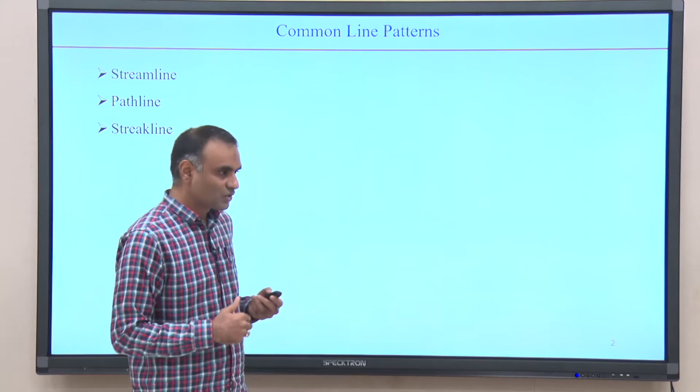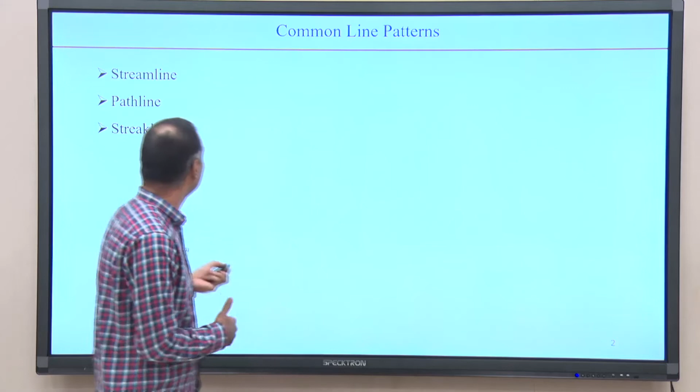If you want to compare your flow visualization experimental studies with some theory, you can compare them following this mathematical framework. So let us look at streamlines first.

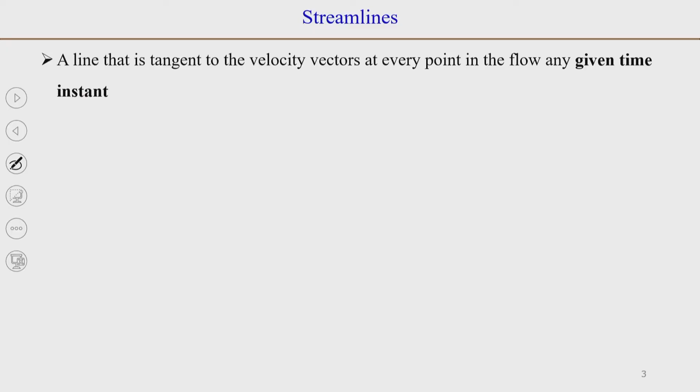Streamlines you might have read about in school probably. A streamline is a line that is tangent to the velocity vectors at every point in the flow at any given time instant. So if you plot a streamline, then at every point on the streamline, the tangent represents the velocity at that particular point.

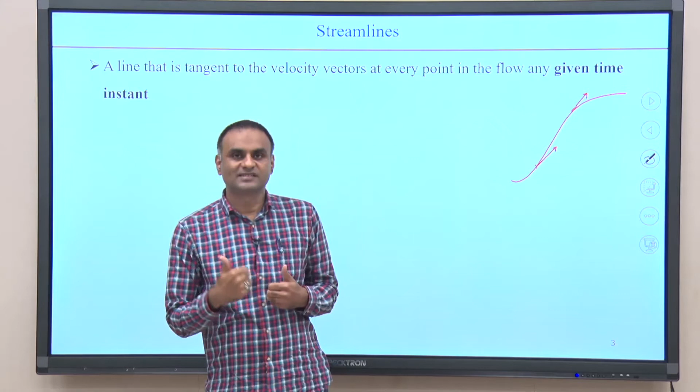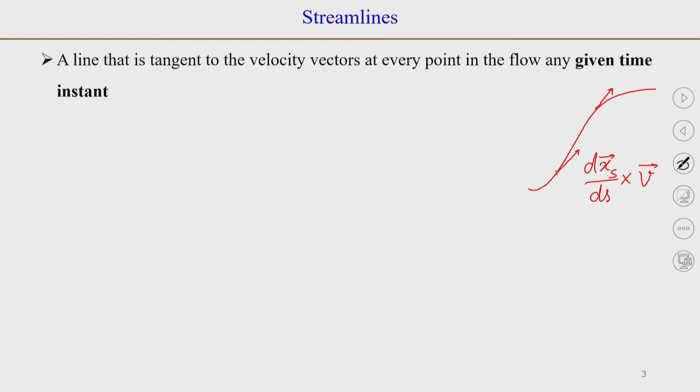That means if you take the position vector of the streamline, let's say dxs vector, and take its cross product with the velocity vector, so if you have dxs by ds, which is the slope of this, multiplied by the velocity vector, that will give you zero because they are along the same line, or parallel to each other.

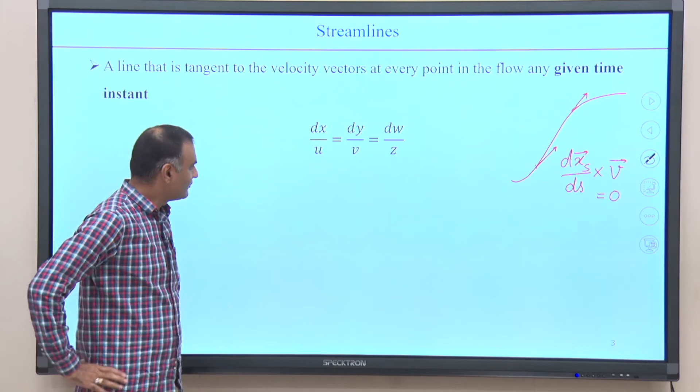If you simplify this, what you get is dx by u is equal to dy by v is equal to dz by w. Here x, y, z are the coordinates at that point in the streamline, and u, v, w are the velocity components along the x, y and z directions.

If you have a two-dimensional flow, where this should have been the other way around - this should have been dz and this should have been w. Sorry for the typo.

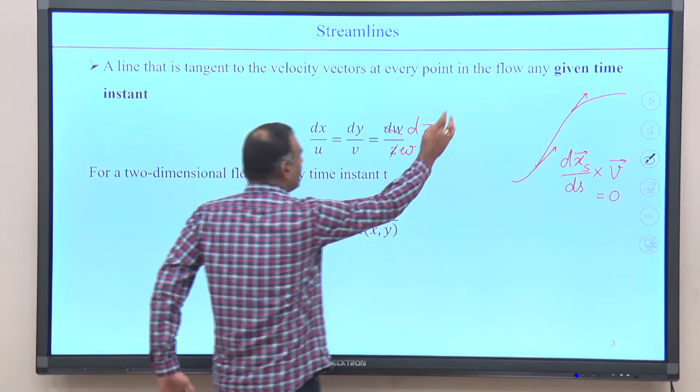If the flow is two-dimensional, then this component will not be there, the z component of velocity will not be there, w is equal to 0, and then you will have dx by u is equal to dy by v. So you can easily find the slope of this streamline by rearranging this equation, that dy by dx, which is the slope of the streamline, is equal to v by u.

Another point to see here is the streamline is plotted at a time instant t. So if your flow is steady, your streamline is not going to change, but if your flow is unsteady, the velocity is dependent on time. At a particular point, the velocity may change with time because the flow is unsteady. In that case, your streamlines will be changing with time. So when you talk about streamlines, you are talking about the streamline at a time instant, say t equal to 3 seconds, and the streamline at t equal to 4 seconds will be different if the flow is not steady.

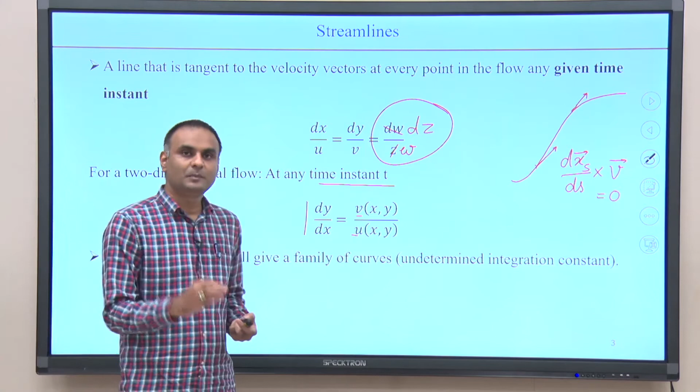So if we know the velocity vector, the y and x components of velocity, in a two-dimensional flow in the xy plane, then by integrating this equation you will get the streamlines, but you will have an integration constant. So when you vary that constant, what you get is a family of curves. Now, if you want to determine a particular streamline, you will need a condition to determine that constant. So let's say if you are asked to find the streamline passing through a particular point x naught, y naught, then you can find that constant by substituting the values and find a particular streamline.

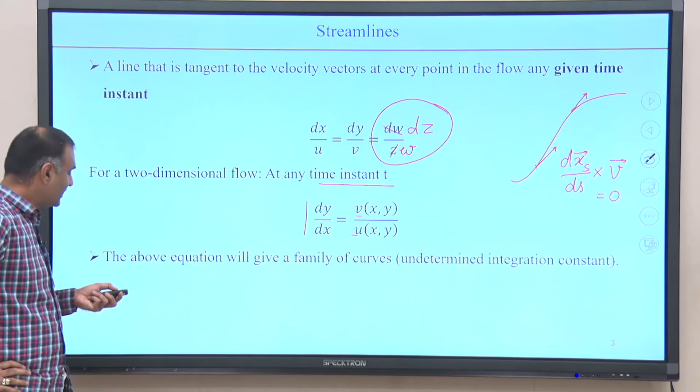Let us look at an example here. We have the velocity vector a y i plus b t j, so it is a two dimensional flow. The x component of velocity is dependent on the y coordinate, and the y component of velocity is dependent on time. Now, if we want to find the equation of a streamline that is passing through point x naught, y naught at time t, note that the velocity is dependent on time.

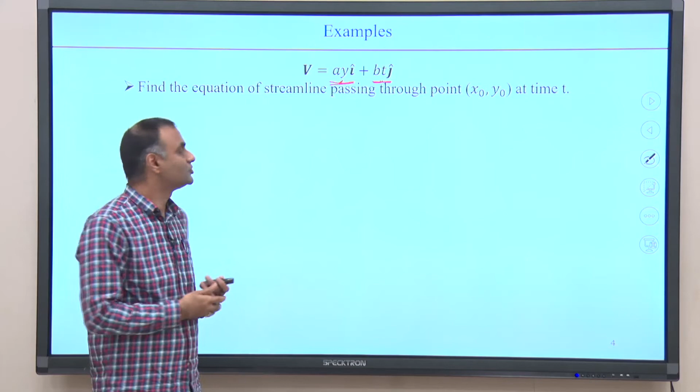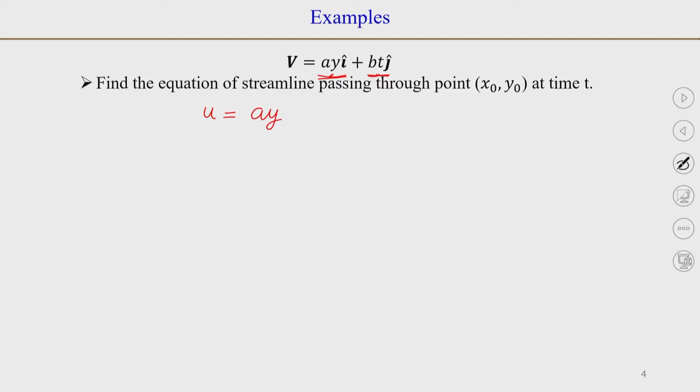So when finding out the streamline, you will need to know the time instant at which you want to plot the streamline. We can write down the x component of velocity u is equal to a y, and the y component of velocity is equal to b into t.

You can write dy by dx is equal to v by u, where v is bt and u is equal to a y. So if you rearrange it, you will get y dy is equal to b t by a dx, and on integration you will get y squared by 2.

When you integrate, you will integrate with the constants, and because we know that at time t this is passing through point x naught, y naught, you can take the integration limits from y naught to y and x naught to x.

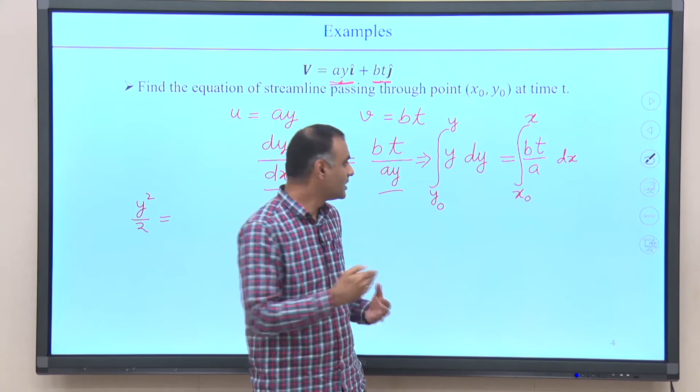Now you also note that because we are talking about a streamline at time t is equal to t1, t2, 3 seconds, 4 seconds, we are talking about a particular time. So this time, when you do the integration, you will be treating as a constant.

So when you integrate, you get y squared by 2 minus y naught squared by 2 is equal to b t by a, which is constant, into when you integrate dx you will get x, and substituting the limit you will get x minus x naught.

So the equation you will get is y squared by 2 is equal to y naught squared by 2 plus b t by a into x minus x naught. That is the equation of the streamline.

Or if you multiply everywhere by 2, you will get y squared is equal to 2 b t by a into x minus x naught plus y naught squared.

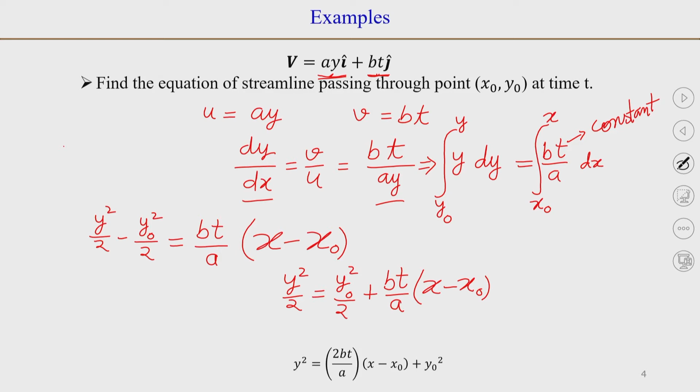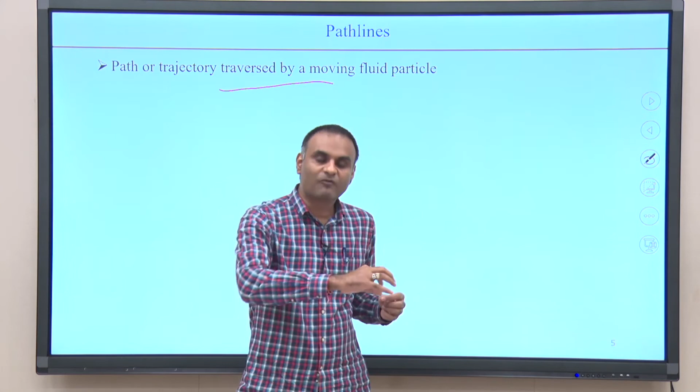Let us move to the next line, which is called path line. Path line is simply the path or trajectory followed or traversed by a moving fluid particle. So if you take a solid particle, dip it in a flow or introduce it in the flow, the particle should be neutrally buoyant so that it is following the motion of the fluid only, and if you keep following the motion of this particle, the line traced will be what is called the path line.

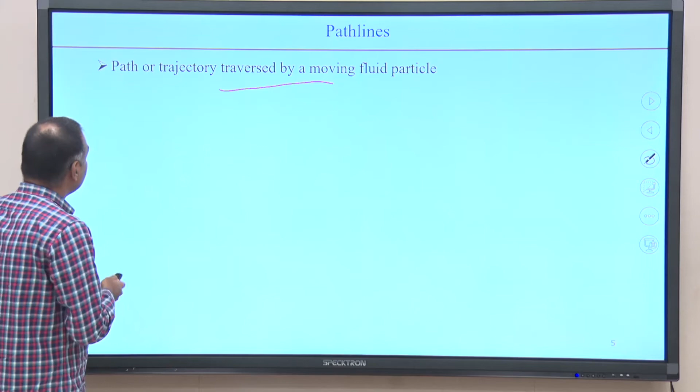So at every point the velocity of the fluid particle will be the fluid velocity. For simplicity, let us talk about a 2D path line in the xy plane. If we say that the coordinate of this particle is x p and y p, then we can write down, instantaneous at time t, dx p by dt is equal to u(x,y,t) and dy p by dt is equal to v(x,y,t), where x, y is the space coordinate and x p, y p is the coordinate of the particle at time instant t.

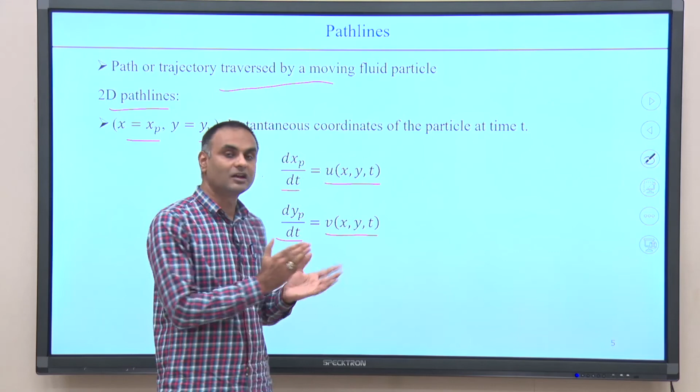So we can integrate these equations, and you will find out that when you integrate this equation, you will get x p as a function of time. You integrate the other equation, you will get y p as a function of time, and to plot the path line, what you can do is eliminate time.

So you will get an equation of the path line, or if you just want to simply plot, you can have three columns, say in an Excel sheet, or make a table where you are plotting time, x and y. Of course, to find out the particular path line, you will need the initial position of the particle: at time t equal to t naught, what is the x location of the particle and what is the y location of the particle, so x naught and y naught.

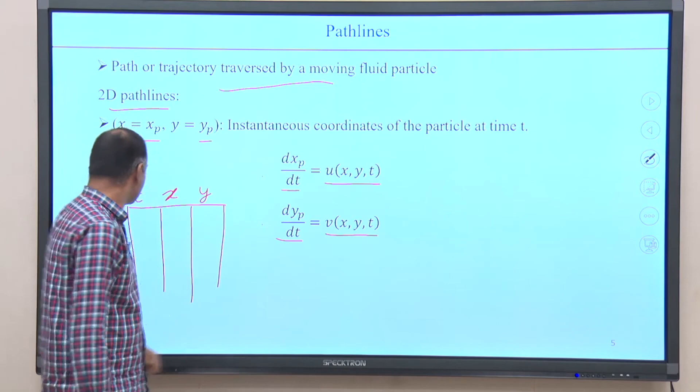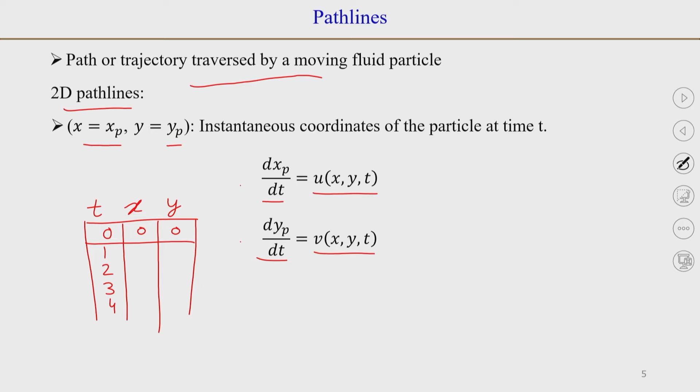So you will start with, say, if the particle is at time t equal to 0 at position x equal to 0 and y equal to 0, and then you can keep finding out what the location of the particle is, and plot x and y on an xy plane. So you will get the path line in the xy plane.

Let us look again at the same example. You have velocity v equal to a y i plus b t j, and you want to find the path line of a fluid particle that was at point x0, y0 at time t0. So if we write down dxp by dt, that is equal to a y, and dyp by dt is equal to b t. Since this equation has a y in it, let us find y first.

So this will give us dyp is equal to b t dt, and when you integrate, we integrate it from time t naught to t, and y naught to yp. After integration we get yp minus y naught equal to b t squared by 2, so b by 2 times t squared minus t naught squared.

We can substitute this here, so we get dxp by dt equal to... because y, as we can see, this will be the yp. So yp is a function of time, and when we integrate with respect to time, we need to know the functional dependence of yp on time. So we substitute a into y naught plus b divided by 2 times t squared minus t naught squared.

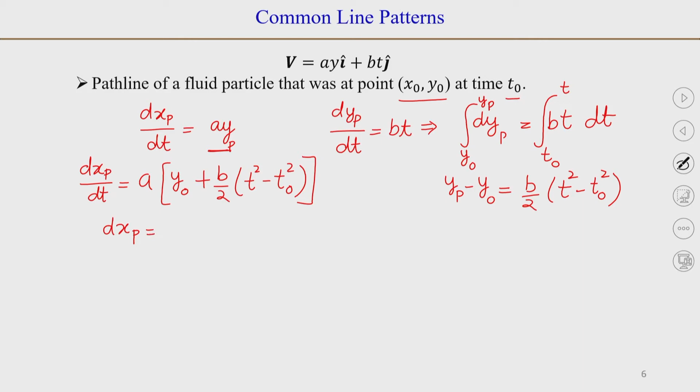So we can write dxp is equal to a y naught, and we integrate this dxp from x naught to xp: a y naught plus b by 2 times t squared minus t naught squared, all within bracket multiplied by dt, and we integrate it from t naught to t.

So when we write this, we get xp minus x naught equal to, integrating with respect to t, a y naught is a constant, so a y naught into t minus t naught plus... we left one a here, so this should have been a b by 2, and if we take these two terms separately and integrate: a b by 2 into t cube by 3, so we can write a b by 6 times t cube minus t naught cube. The next term will be minus a b by 2 t naught squared, which is a constant.

To plot the path line you can either substitute, rearrange this equation algebraically to find t as a function of yp, and substitute here, giving an equation in terms of xp and yp by eliminating time t. Or if you want to plot it, you can simply make a table in terms of t, x and y. Starting at time t naught, the particle is at position x naught, y naught, then at t naught plus delta t you find the new x and y values. Keep doing this, then plot x versus y on a plane — that will be your path line.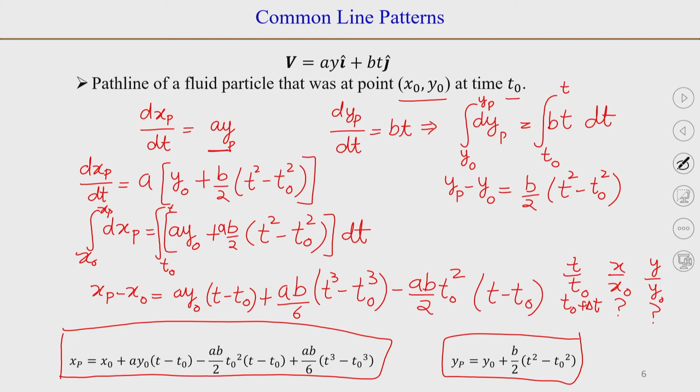Now, streak line. The streak line is slightly cumbersome, slightly difficult — I generally find it difficult to comprehend, but let me try to explain it.

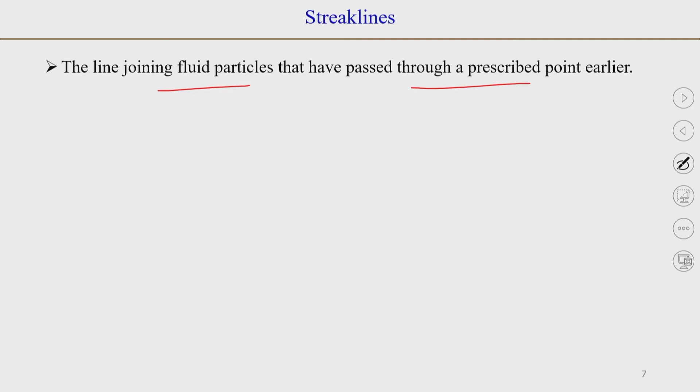The streak line is a line that joins fluid particles that have passed through a prescribed point earlier. If we visualize it, at a time instant t, a fluid particle is at point P, x naught, y naught — this is the streak source. It is the instantaneous position of all those fluid particles which have passed through point P at earlier times. So this particle, which is now here at this location, was at point P at time t equal to 0.

This particle at t is equal to 1 second was at point P. This particle was at point P at t is equal to 6 seconds, and so on.

So basically, say you have a school, and in a particular class, let's say class 12th, students are given roll numbers from 1 to 50. There are 50 seats in the class, and over the years, each year one student will have a roll number, say 27.

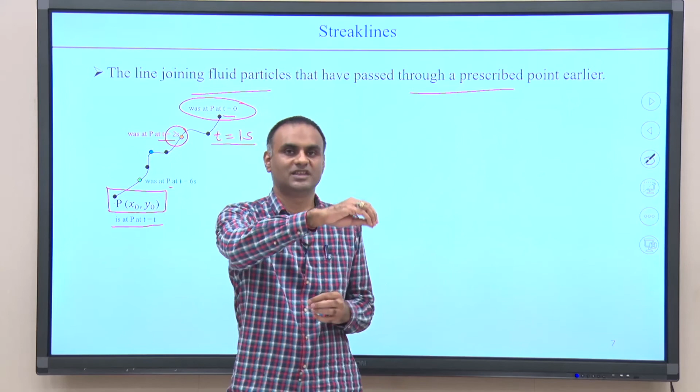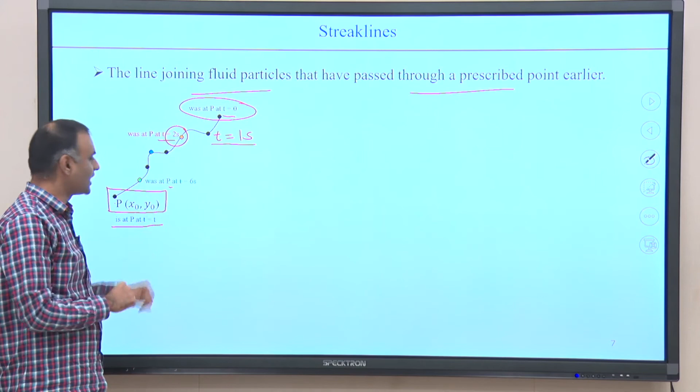Now if you connect the dots over, say, the last 10 years and find out the instantaneous position or instantaneous location of these students, connect these dots, then what you get is a streak line. So a streak line is plotted at time t, and it is the history of all those points which were at point P at time t0. So it is the location of a particle.

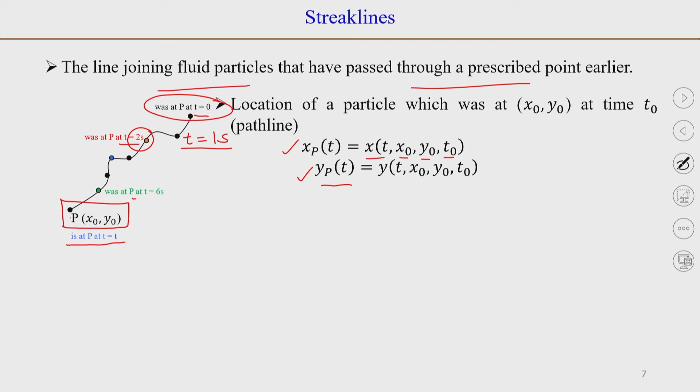If we want to define it mathematically, we already know from the definition of path line, when we write down the path line, by solving the equations we can find xp and yp. These two equations will give the location of a particle at time t, which was at time t naught at point x naught, y naught. Similarly, yp(t) will give the position of the particle, the y coordinate of the particle, which was at time t0 at point x naught, y naught.

Now, if we see this equation in a different light, then you will get the equations of a streak line. A streak line is the instantaneous location of the fluid particles that were at time t naught at point P. So what we need to vary now is t naught.

Here, when we are trying to plot the path line, we know that we are following the position of a particular particle. So at time t0, this particle was at point x naught, y naught, and t naught is fixed, and we write down the table for t, xp and yp, because time is varying.

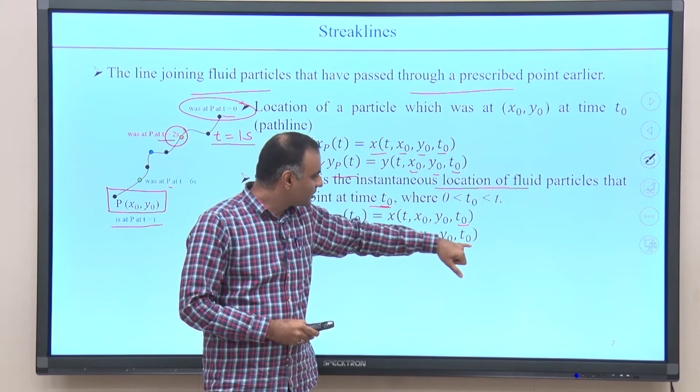Whereas in this case, we are plotting the streak line at a time instant t, and we are looking at all the particles which were at time t0, which is varying from 0 to t. Those particles were at x naught, y naught. So while xp and yp are functions of time for path lines, these will be functions of t naught for streak lines.

When you want to find the streak line, what you can do is make a table of t naught, x, y, and time t. So you can use these equations and find the position of the particle.

So all the particles which were... let's say if you substitute t0 is equal to 0 in this equation, and you are finding the location of the particle at time t. So time t is fixed, let's say t is equal to 5 seconds. So you will say that at t is equal to 5 seconds and t naught is equal to 0, x0 y0 remains same, you find x streak, same for y streak, and you do it by varying t naught.

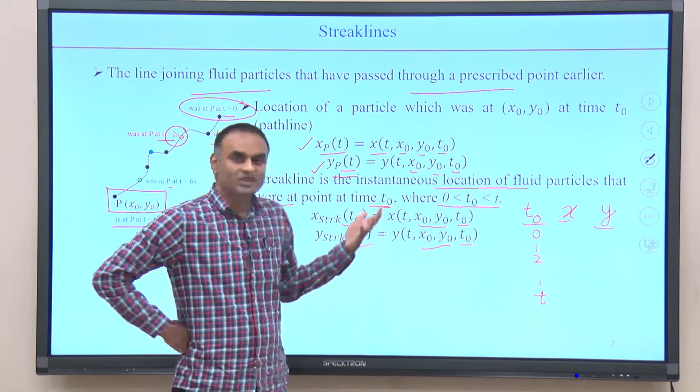So you will get the instantaneous location of the particles which were at different times, say t is equal to 0 second, 1 second, 2 second, at point x naught, y naught. So the equations remain the same. The only thing changing here is that t naught becomes a variable between 0 to t, and when you plot it, you get the equation of the streak line.

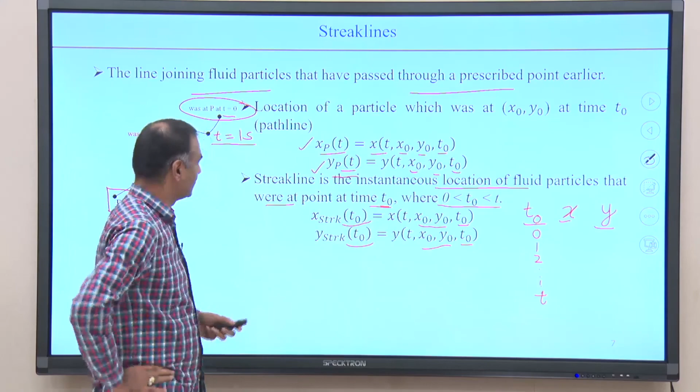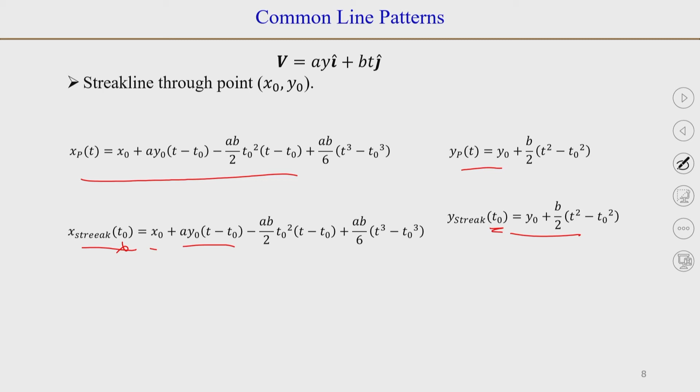Now, if we look at the same example and need to find the streak line through source point x naught, y naught at time t, we write down the equation of the path line that we obtained earlier, and substitute it as a function of t naught: x naught plus a, y naught, t minus t naught. So the equation remains the same, what we've changed is varying t naught, and we need to vary t naught and find x and y, which will give us the streak line.

Now, if we look at all three lines together: streamlines are defined at a particular time instant, and it gives us a particular snapshot of the flow field at that particular instant.

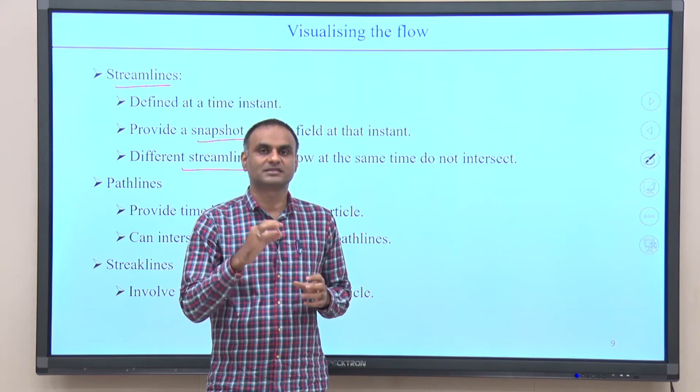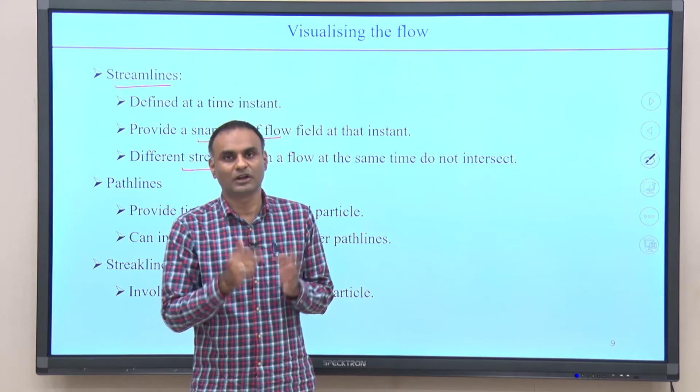At a particular point, the streamline's slope gives the velocity vector. So streamlines cannot intersect, because if two streamlines intersect, that means there would be two directions at that particular point. A fluid particle at a time instant, present at one particular location, cannot have two velocities. That is why streamlines do not intersect.

Now path lines provide the time history of a fluid particle. A fluid particle can keep passing through the same point again and again, so path lines can intersect, and path lines are not at a particular time instant, since it is a time history. They vary over a particular time, so unlike streamlines, they are plotted over a period of time.

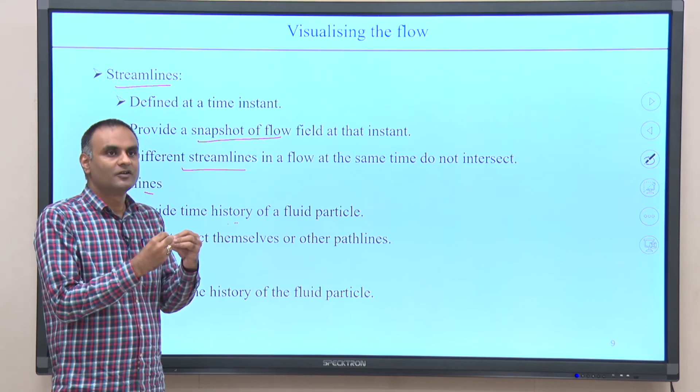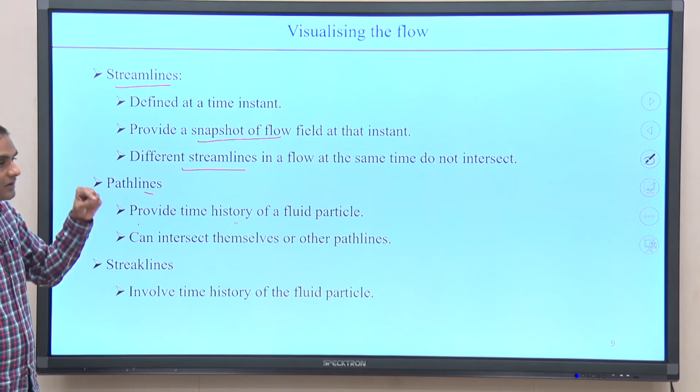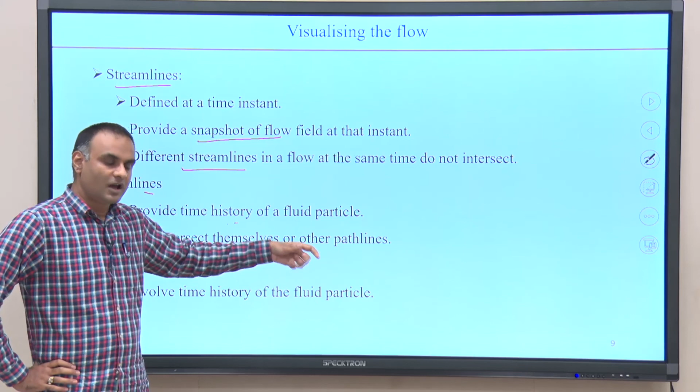Streak lines you plot at a particular time instant, but they also involve the history of the fluid particle - the particles which have passed from a particular point between time 0 and t. The streak line involves the time history of the fluid particle, but if you look at a particular point on a streak line, that represents the instantaneous position of a fluid particle which was present at some earlier time at point x naught, y naught.

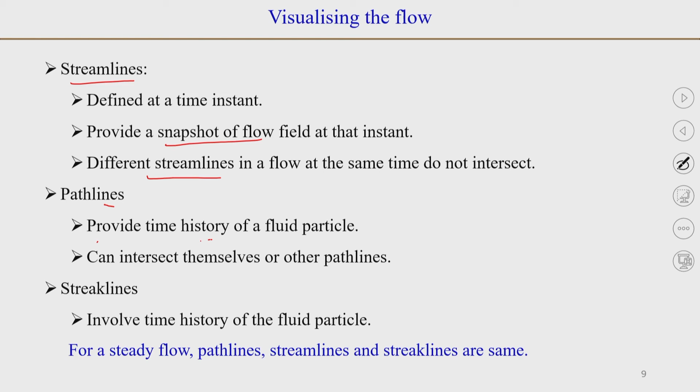If the flow is steady, then path lines, streamlines and streak lines are all the same. It is only when the flow is unsteady that you will find these lines are different.

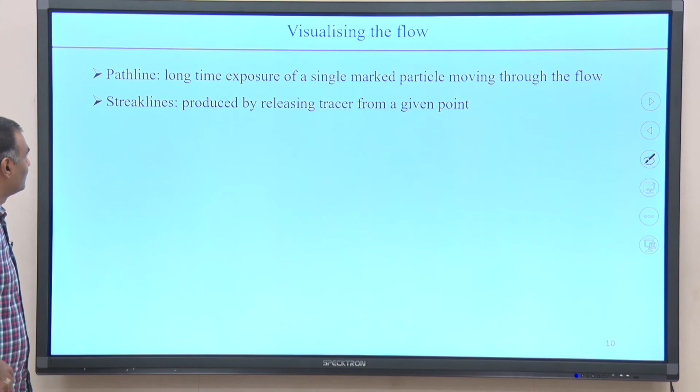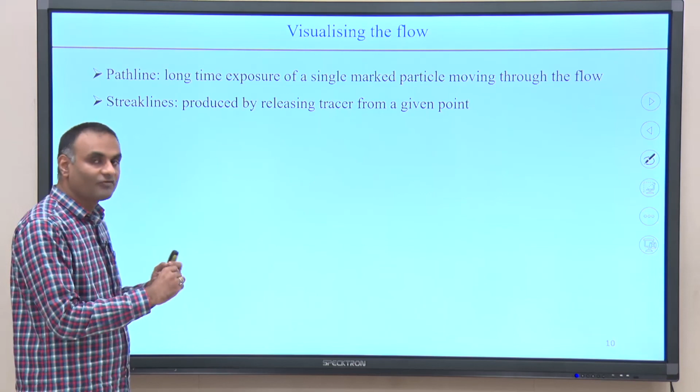When you want to visualize the flow, if you take a long time exposure of a single marked particle, marking the position of a fluid particle over time, then you will get the path line. If you introduce a tracer at a particular point, such as a dye, and keep introducing it, then following the fluid particle or the path of this dye, what you get is the streak line.

Some methods commonly used to visualize the flow: you can introduce a dye in liquid or gaseous form, introduce smoke in gases or bubbles, use neutral density particles, also called non-buoyant particles, which can act as tracers. In liquid flow, sometimes flakes can be introduced which follow the fluid particle, or some powder.

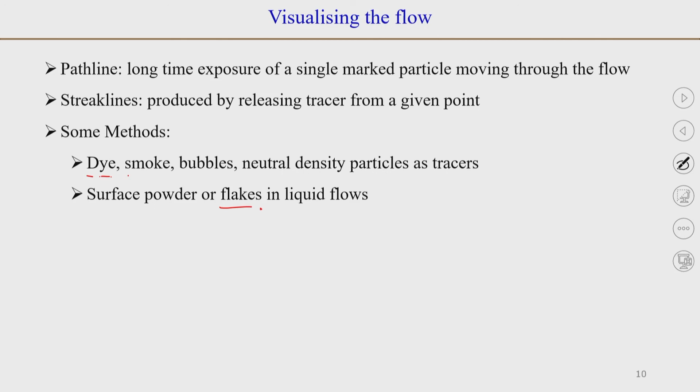For example, if you want to do simple, cheap experiments, you can introduce a powder in the fluid which you think can follow the fluid faithfully. In some cases, when heat transfer is involved and you are looking at where the fluid, gas, or evaporated vapor is going on boundary surfaces, you can use an evaporative coating on those surfaces.

There is also a very popular and novel technique for finding the 3-dimensional velocity in the fluid, called particle image velocimetry. When you do particle image velocimetry, if the concentration of particles is low, then you call it particle tracking velocimetry.

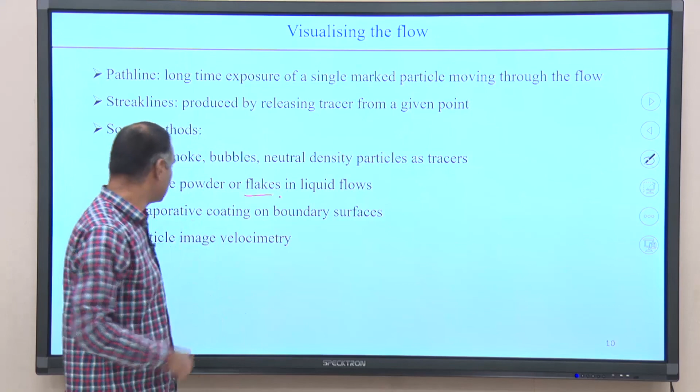Basically, what you do is take pictures of the fluid particle at different time instants - different frames of the particle or particles at low concentrations at time t equals 0, 1, 2, and so on, where the delta t, or the interval between the two photographs, is small. This ensures you are able to capture the fluid particle, giving you a fair understanding of the flow patterns.

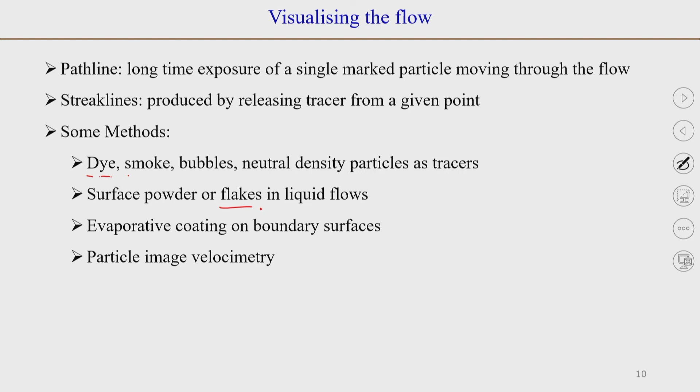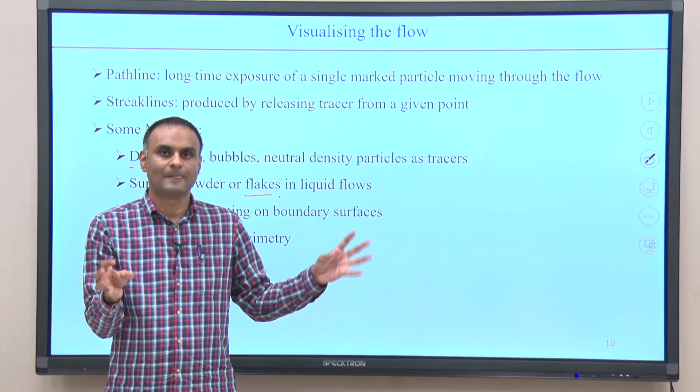So in this lecture, we looked at path lines, streamlines and streak lines, and saw how to define these lines mathematically. It will help if you can draw these lines in Excel, so you get a fair understanding of the difference between streamlines, path lines and streak lines. If you plot the two equations, you will appreciate the difference between path line and streak line. Okay, we will stop here. Thank you.